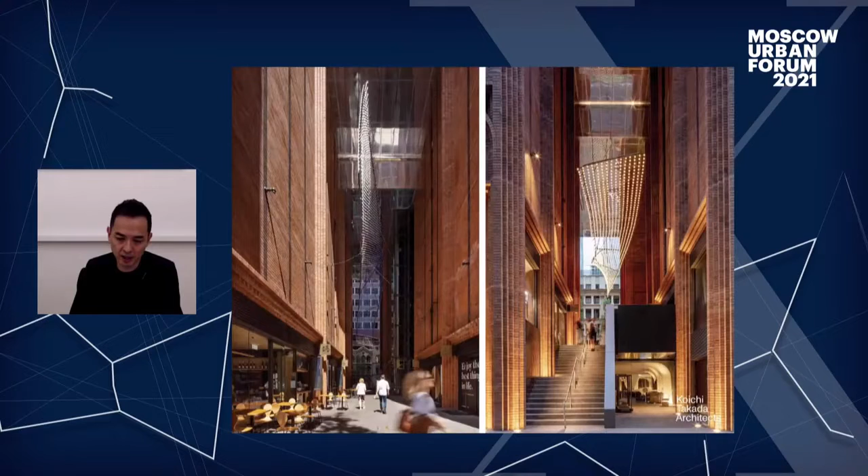ARC is a mixed-use project we designed in Sydney CBD before the pandemic crisis took place. ARC was conceived with people in mind. The mixed-use functions include residential, hotel, office, retail, food and beverage. We designed a laneway to bring people into the heart of the building. By opening up and giving back the public realm, we aim to humanize architecture.

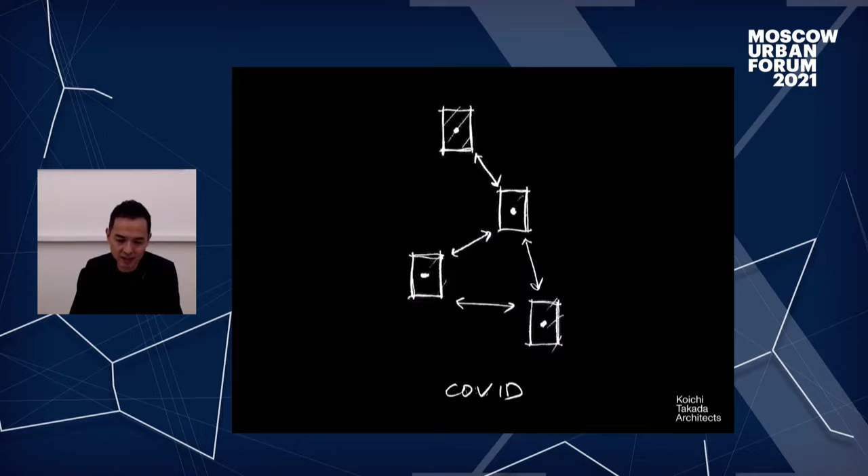But during the pandemic, celebrating the public domain has been challenged because of social distancing. Our cities and public spaces have become empty. So how do we measure the success and the balance of architecture when people disappear from the city?

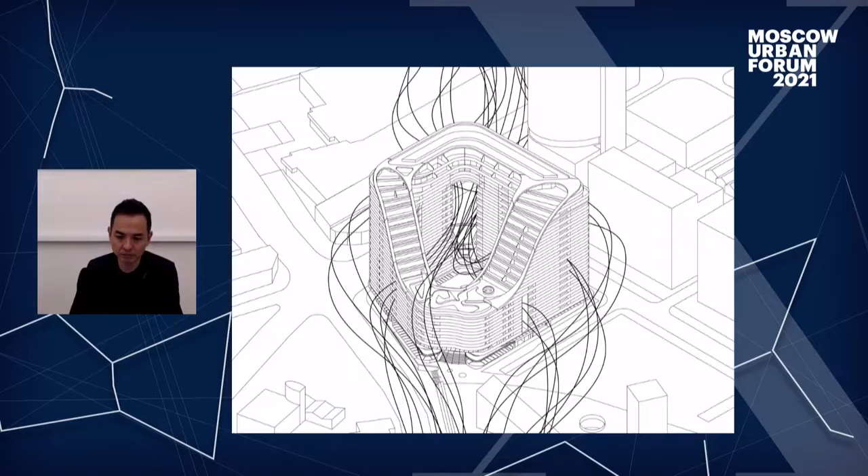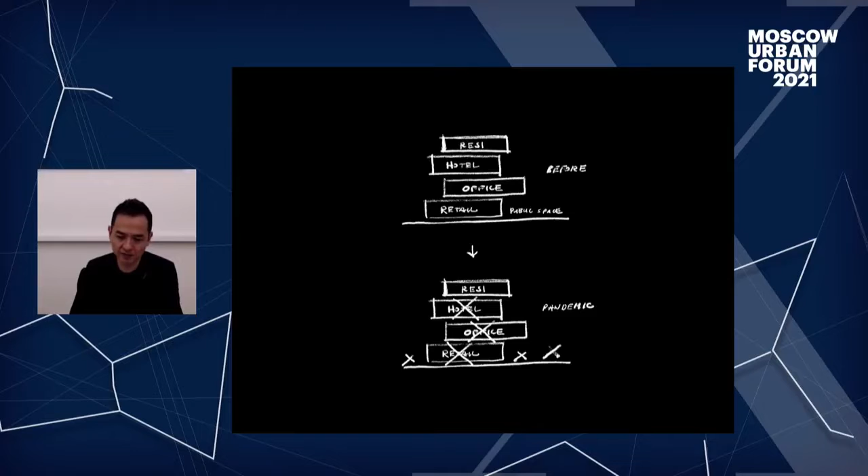So the pandemic has highlighted limitations in the mixed-use model. Both my projects ARC and Infinity suffered during the pandemic because retail went to online shopping, food and beverage became takeaway only, offices became empty, and hotels were used for quarantine purposes. However, the residential function survived. So if we are to focus on residential moving forward, what is the new measure of the balance?

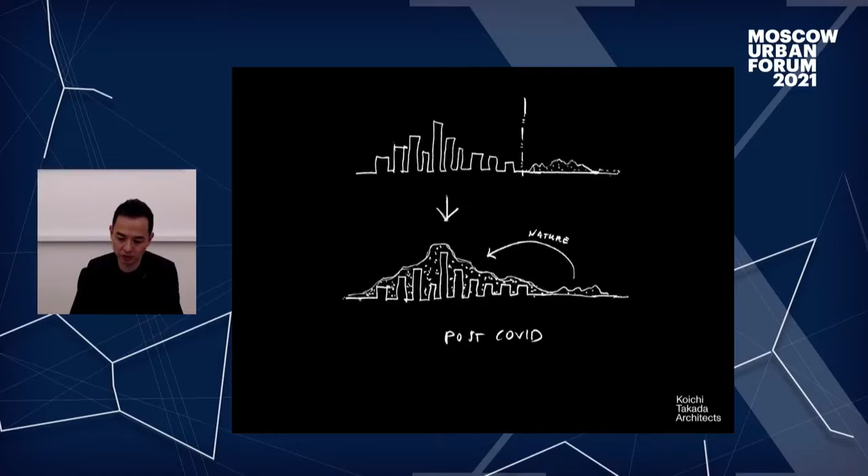I believe that post-pandemic, this is a great opportunity to pause and rethink, and not just adapt, but we must shift the paradigm from industrial to natural. This is one of my key responses moving forward: to bring nature back into the city.

I would now like to demonstrate this point with two new mixed-use residential projects, one proposed in the city and the other in the countryside. Urban Forest is a mixed-use project located in South Brisbane, aiming to be the greenest building in the world. The project draws inspiration from Australia's Daintree rainforest, one of the oldest rainforests in the world.

Urban Forest will be carbon neutral ready and provides generous outdoor space, extra space for home office, mixed use residential amenities, and surrounded by nature in the middle of the city, and even urban farming within the building. As opposed to a past project, Arc and Infinity, which provided hard urban surfaces as an extension of the streets, Urban Forest provides a public park which becomes breathing space within the city.

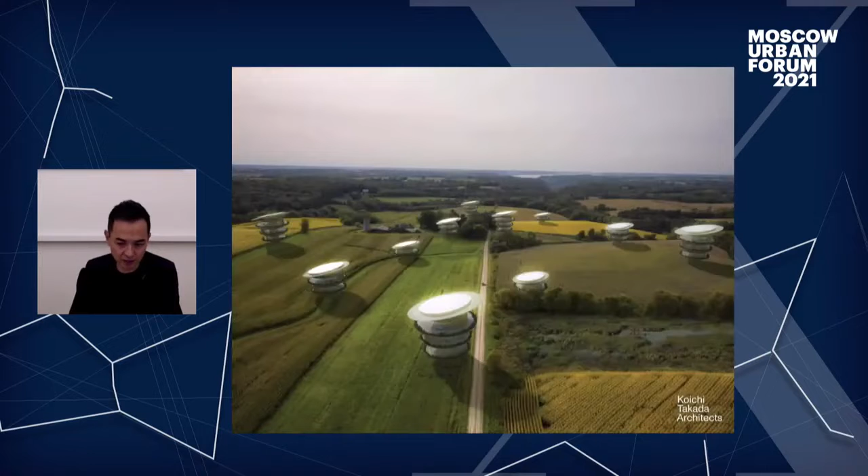Like the sunflower, the roof rotates to follow the sun and harness its power to store energy. Equally, the floors can rotate, following the sun during winter and turning away from the sun during summer.

This way of living and working in the countryside is challenging the traditional idea of mixed use in the city. Measuring the architectural success for the future should equally emphasize how we integrate nature in our daily life. Nature is the key. This last project I'm showing you is a mixed-use project in Shanghai, but without residential.

Solar Trees future-proofs the need for mixed use by creating one big flexible space. It is multifunctional architecture designed to adapt and change organically. Solar Trees in Shanghai is powered by the sun and forges a greener future for China. It's fast-tracking China's commitment to be carbon neutral by 2060.

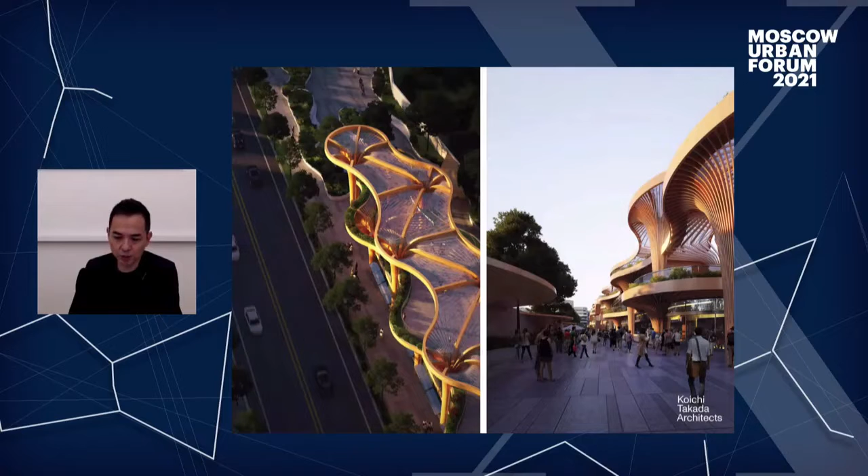Through a nature-inspired approach, this project considers the planet, but also changing function of our spaces, which in turn, we hope to bring people back into our cities. By way of doing this, mixed use becomes much more resilient.

I will finish with this last image, something we all have in common. Climate change and the pandemic has changed our world. So must our architecture. Architecture needs to adapt as quickly as nature does. Because architecture can greatly contribute to the making of healthier and sustainable places, our role never seemed so relevant in the context of healing crisis.

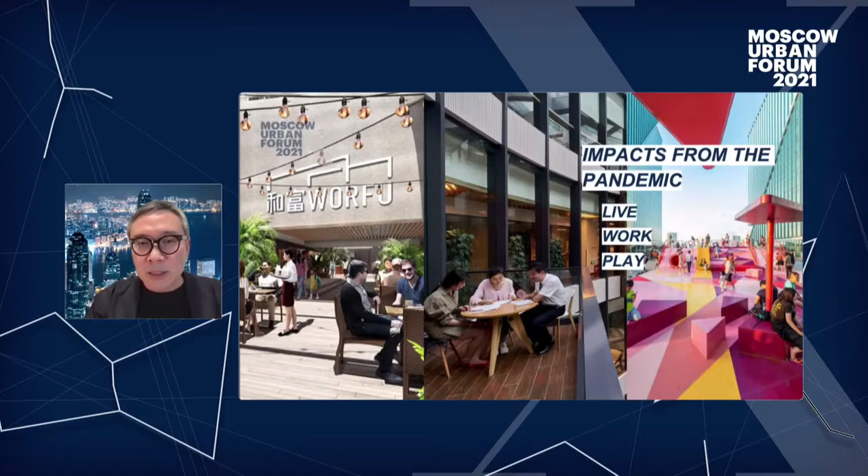I think that the pandemic has really caused a big shift in the way we live, work, and play. Certainly a lot of projects that we know before the pandemic, pre-COVID days, what we call it, they will have a very different effect on the projects in the future. I think many of us are seeing a very clear trend of a very big migration, shift in people. I mean, with people moving out of cities, moving into the suburbs, people are more reliant on online meetings with all the lockdowns that's happening around the world.

The concept of space is very different today, particularly in Hong Kong. Hong Kong is a very crowded city, so it's not easy for people to just move out and go somewhere else. With a lot of the higher property costs here in this part of the world, it is not so easy to move away.

But we certainly can see a lot of people leaving from the West. If you look at the United States, London, and even Japan, there is a very big shift of people moving out of the city. Comparing this with what we're seeing in Asia and Hong Kong, we are also starting to see a shift in the retail industry. When people move out of the city, a lot of the spaces within the town will also have to reinvent themselves.

Traditionally, if we look at the mixed-use model in the past, it really centers around transport as the main hub for connecting all the different functions from living, leisure, office, F&B. But moving on to the new mixed-use model, what we have found is that every project needs to be quite self-sustainable, self-sufficient. Projects tend to become smaller, but more complete, because when people live in the suburbs or move out of town, they need to still be connected. The functionality of the city needs to still be there.

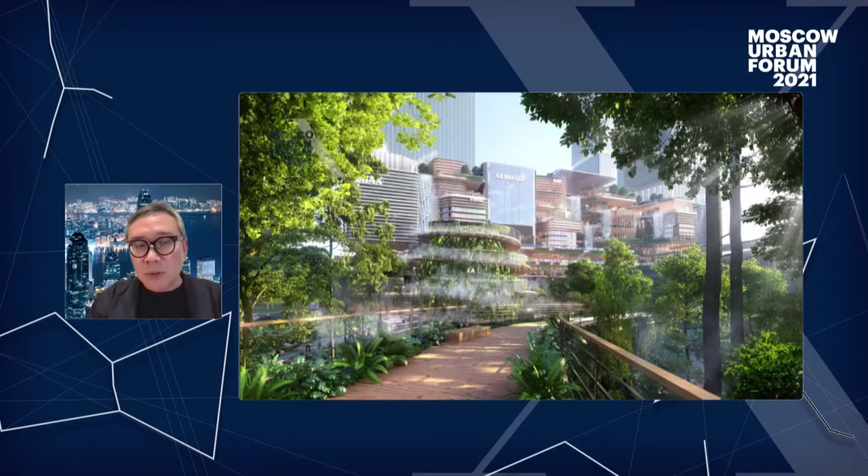But looking at a smaller scale, what we are finding today is that a lot of these mixed-use projects have a very close integration with nature. I think that is really important because, as we've heard before, nature doesn't really need people, but people need nature. So if we think about what happens to the spaces that are left behind, we have to find a very creative and flexible way to adapt to this new ecosystem.

Looking at the traditional model, we tend to see every function as pretty independent from one another. But certainly from this part of the world, from Hong Kong and Asia, a lot of the mixed use today not only combines all the different functionality within the same plot of land, neighborhoods are being changed. We see a lot of pedestrian streets today. People tend to want to live right in the heart of the neighborhood, where you can conveniently go downstairs, get a cup of coffee, and not be too far away from the metro station.

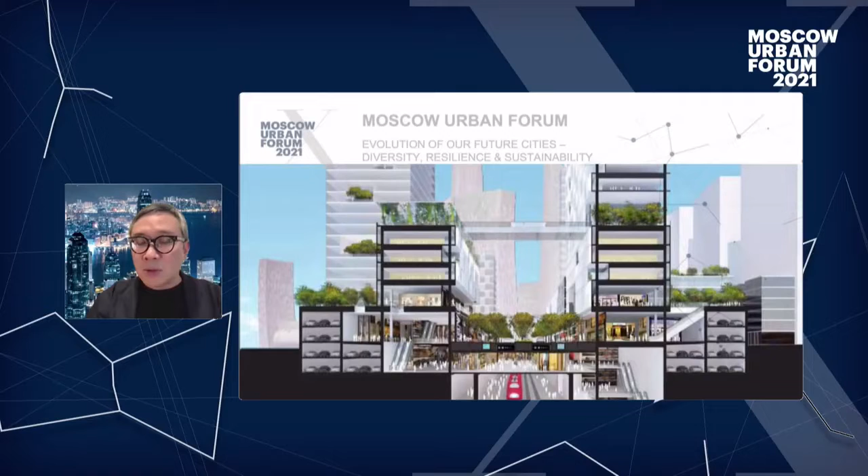But if we look at a bigger model, this project is another one we're working on in Beijing. You can see that the entire high-speed rail system is integrated as part of the basement infrastructure, and that will certainly bring a very big change in our urban environments. We're now seeing mass public transportation at a scale that is really, really huge, integrated within the neighborhood. Not many countries in the world can enable this type of infrastructure.

Looking at it at a smaller scale in Shanghai, this is a project we're currently working on. What we're seeing is a vertical network of road systems, because the projects are getting bigger these days, we cannot depend on the city for the road network.

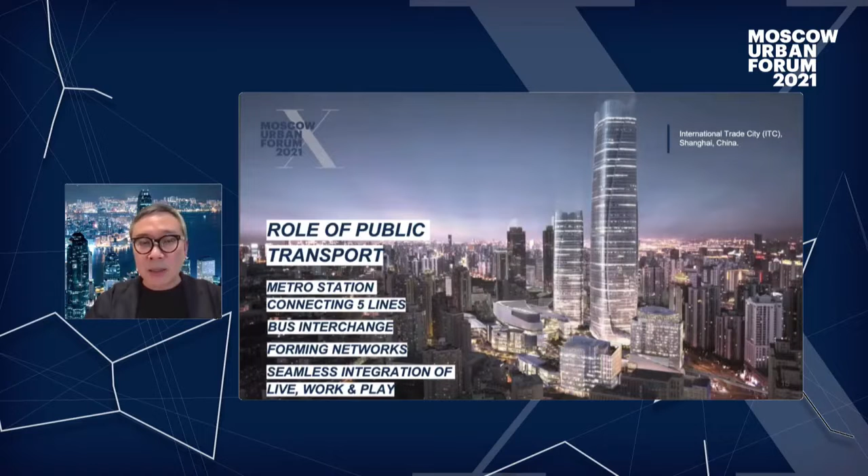It will create a lot of pressure. What we need to do is to create our own internal transport network by allowing cars to drive up to level 2, level 3 hotel, level 4 office. So you can see the role of public transport does play a very major part.

We are also seeing open plazas, elevated streets. Not just this public realm, but a lot of the hotels, apartments, retail, and entertainment components tend to be a lot more seamless today with the role of public transport coming in.

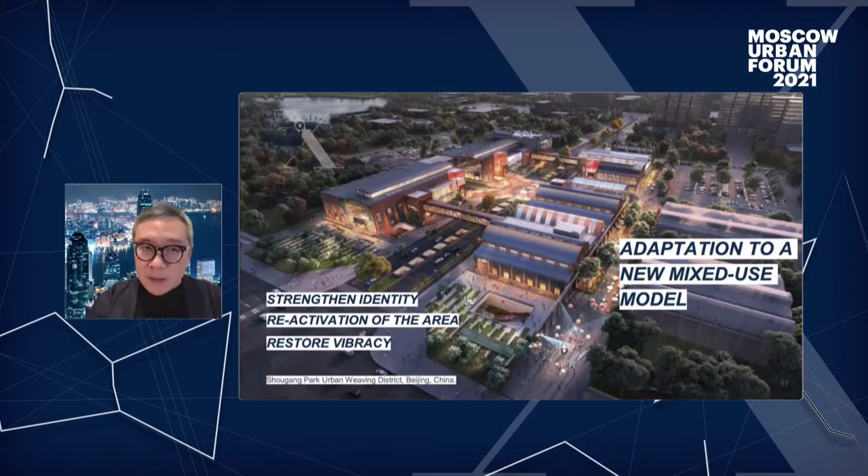And obviously, in every city, there's always history and heritage. So we need to be sensitive with the current use of the building, pre-COVID and post-COVID, to preserve its memory and function. A project in Beijing at the moment - you can see this is a warehouse district that has been regenerated to create a very vibrant commercial community.

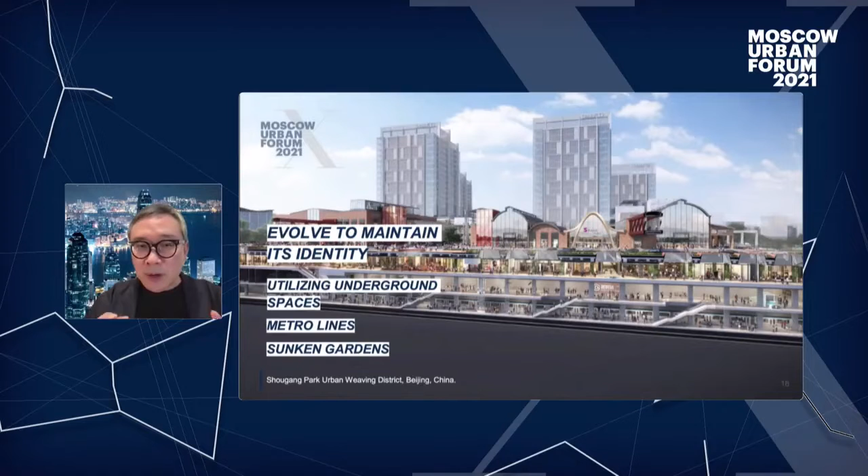And because of the weather, just like Moscow, it gets very cold in the winter. So there is a very big component of the project that is allocated underground, where it connects to the metro system. I'd like to share this, coming towards the end of my materials.

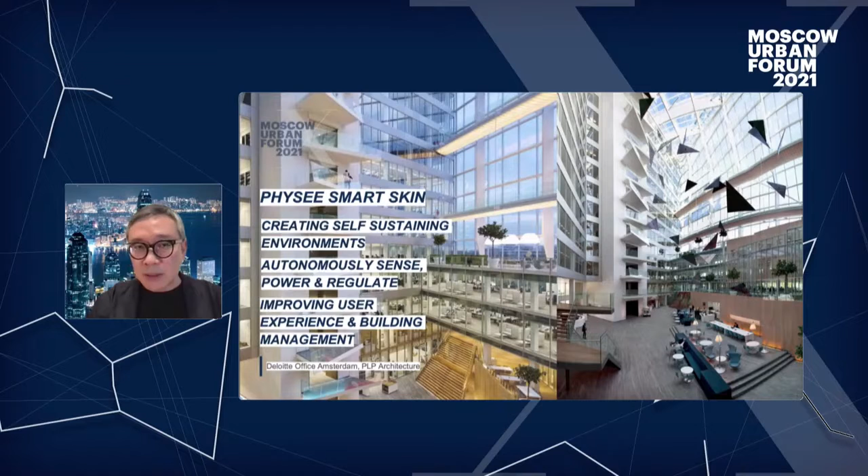And finally, in the course of all this design and construction, we also look at smart materials. There are a lot of very innovative materials on the market today. Some we really like include the concept of a transparent solar skin that can be integrated as part of the curtain wall systems in buildings, creating an innovative way of harnessing energy that we can reuse.

And even kinetic paving, very popular in Hong Kong today - we see this being adopted commonly across a lot of projects. Also the media scheme concept, creating a super transparent media that could be part of the architecture of our facade. This also enables a lot of information to be shared, and I think that will certainly transform the way we look at buildings in the future.

So these are some of the points that we feel are interesting, and I'm really glad to be able to share that with everyone today. Thank you.

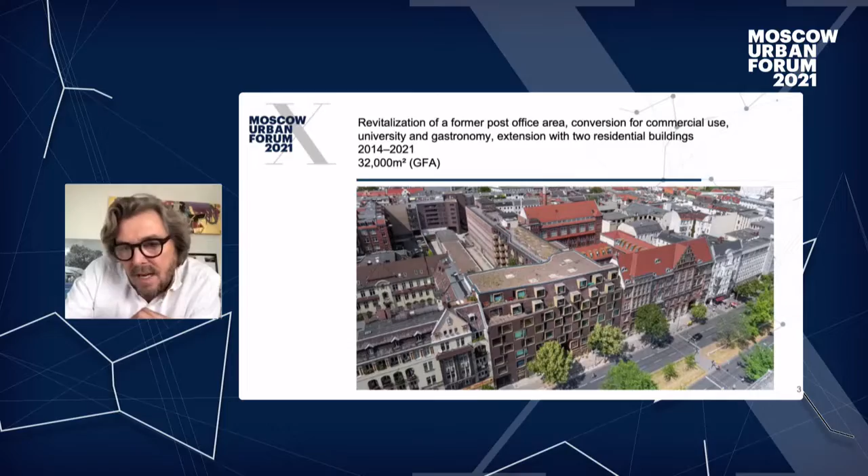This is a project in Berlin I want to show you, because I think it shows nicely what we try to do there. It's an entire block, in between two different streets—one very busy, one more pedestrian. It is a construction site that started at the fin de siècle, in 1903.

The first post office in Berlin was created there, and that was the first building. Then House 2 came in 1915, when the telephone was invented, you had the people that connect people. In 1931, all of a sudden the car is helping in the postal services and so forth. So over time, buildings had accumulated and they all created their own little identity.

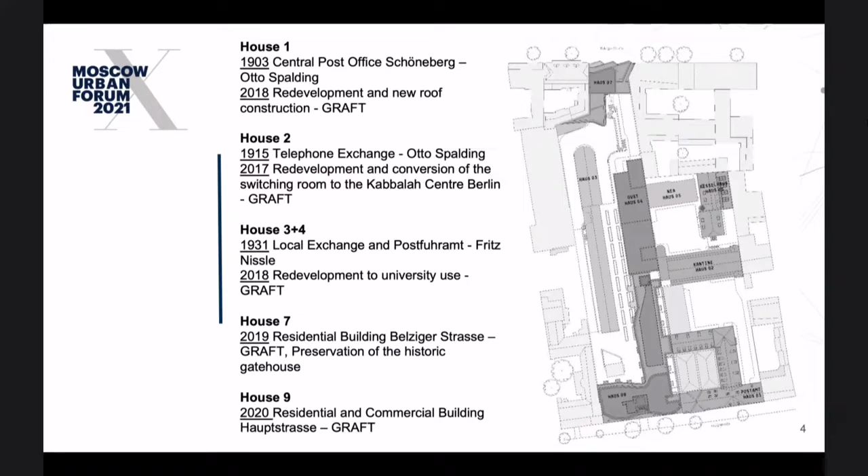When we were asked, a bit before 2018, to redevelop it, we tried to look at the buildings and honor their characteristics, honor their own identity. This is the project from the top—I don't know if you can see my cursor, but basically this whole environment here in the center is our project.

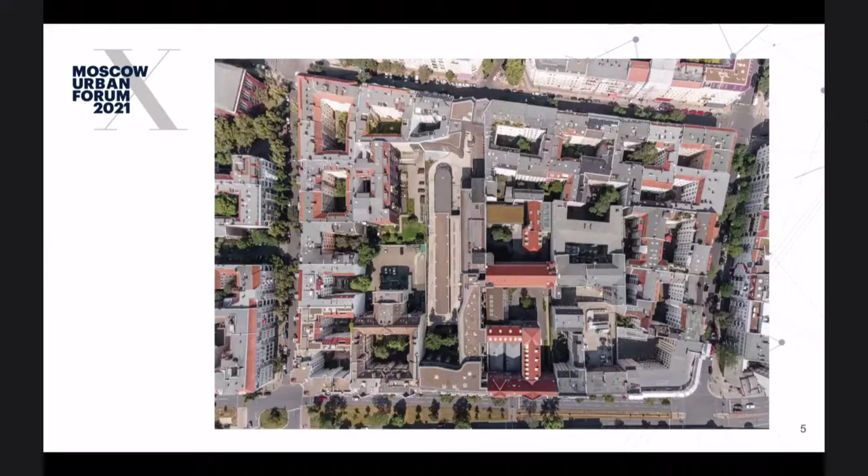We added a couple of components and reused most of the spaces into different things. There's still a post office, but it's much smaller. And we added new functions, especially residential parts.

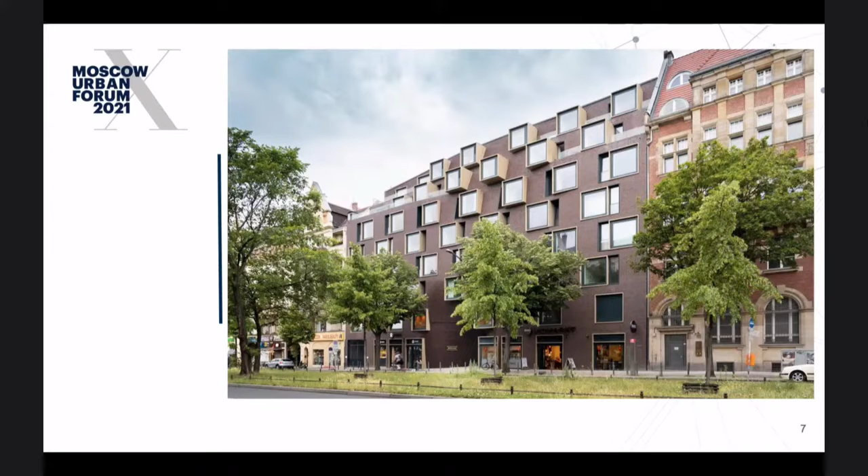The facade to the front is basically trying to use the brick story we found in Berlin and push it forward. You can see a residential building on top with windows—these windows basically establish the facade, whereas the brick, which you'd think is the facade, the brick structure now is actually opening up. It becomes amorphous.

It creates an entrance, basically bends away as a roof structure, but it's still brick. It's very nice because it's a protected environment there—a monument on the right of us—so we connect to the buildings left and right. The boxes establish the facade, they are straight, and the brick can move. It's like a little element that can move very nicely, and that's what we try to do.

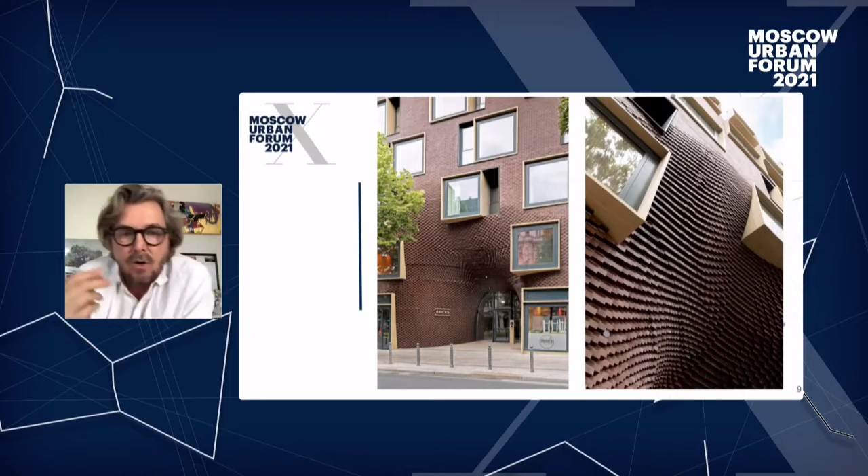We have retail on the ground floor, and living areas on top with little terraces, only in the roof. Then these boxes bend to the back, and from the inside you create a new space, an interesting space where we don't tell people how to use them—they create their own rituals. Whether this is your bedroom, your tea ceremony room, or just a hangout, that's up for you to decide.

When we go into the courtyard, we change these boxes into outside spaces. As I said, I believe every apartment these days needs an outside space. How you do that in towers is, of course, a little bit more difficult, but there are other ways to do this—Berlin is not necessarily a high city.

It's coming a little bit too slowly, I think. But here, this is not high-rise buildings, so you have to create these balconies that create their own personal framework in front of your door. So the boxes change into outside areas.

As you can see, also in the old elements, all roofs are reused, whether residential or other uses. The same elements, the same material, in this case a champagne-colored metal, is used throughout to create one materiality identity. So here we're looking from the side.

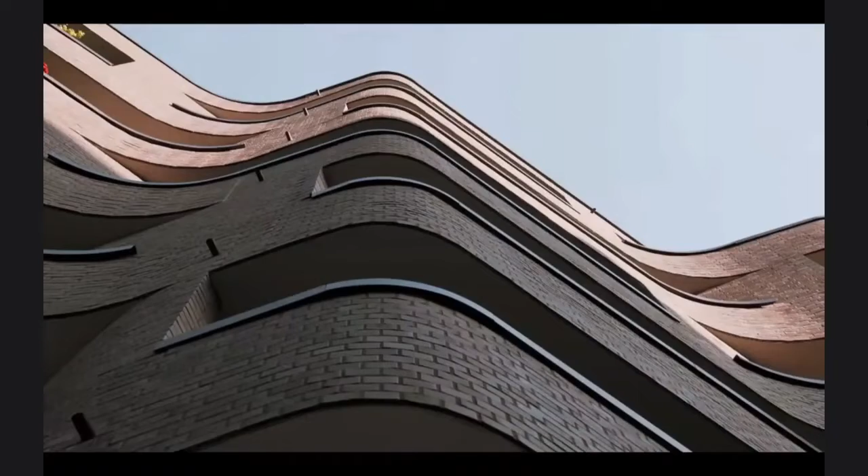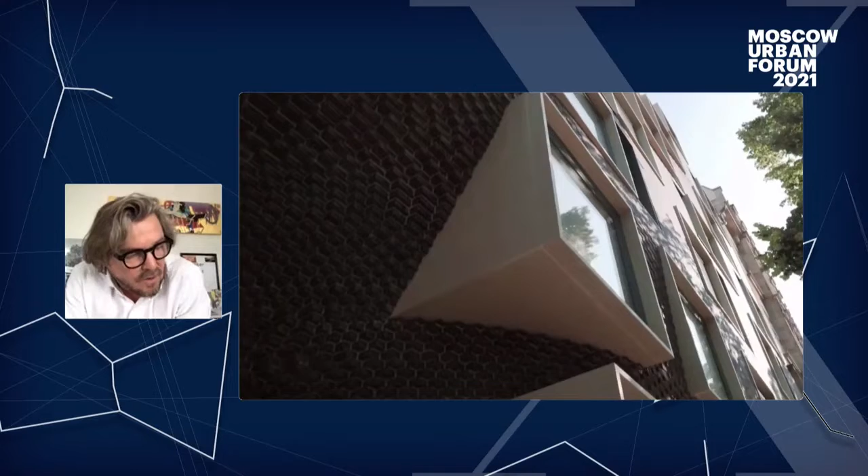The main thing, I think, is identity. For us architects, if you want to reuse things, as we've done in this project, there has to be a strength in architecture. And if we don't resolve to bring that strength and build it forward, I think our buildings will not last — meaning there won't be a heritage for the people who come after us. So the resilience of our cities has a lot to do with the identity we create today.

So things can't just look the same everywhere. We have to find the genius loci, work with it, and bring it forward. And there is the resilience of the future. And that is it — thank you so much.

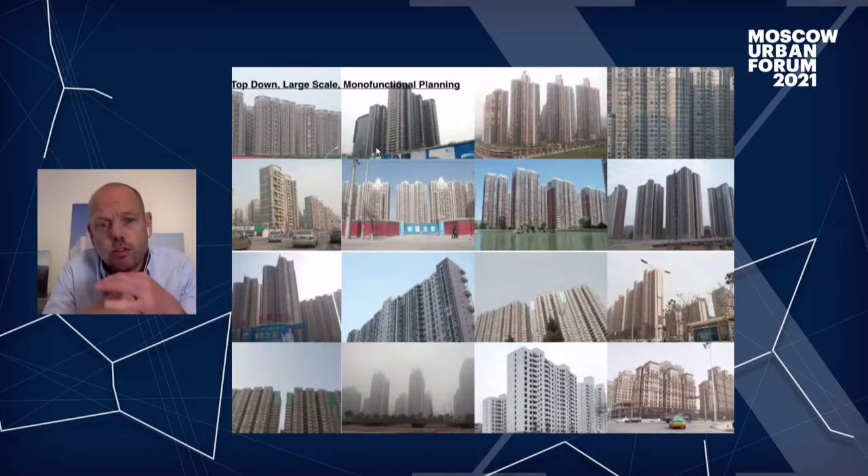I just want to share a little bit of the results of that research. So what we saw in visiting cities all over China, we realized that the method of planning was very much top-down, large-scale, monofunctional throughout China.

But we also found an alternative, the so-called urban village, a very much bottom-up initiative by farmers who saw their environment urbanizing around them and started to build small-scale settlements. The structure behind that urban village is a mixed-use environment combining working and living, very walkable so you don't need a car. It's a fine-grained urban fabric creating diverse living environments, very much market-driven and therefore bottom-up created, high density, and allowing for affordable housing as well.

In one of these urban villages, we met this guy, Mr. Sun. He is a farmer who created his own house, a commercial plinth, an internet bar, a private apartment on top of that, affordable housing, and then urban farming at the rooftop.

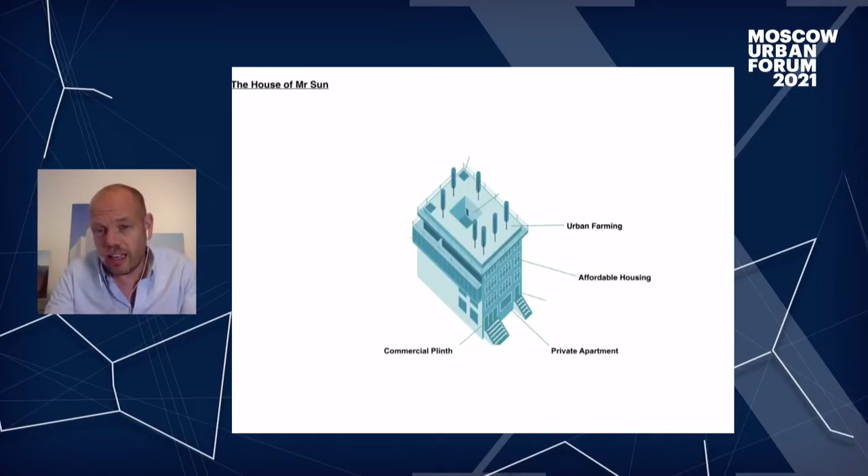That was very much our inspiration for our first building in China, a mixed-use building in the city of Jiaxing, close to Shanghai, where the idea of the village was at the centerpiece of our proposal, a combination of 8 buildings combining hotel, short-stay apartments, sports facilities, offices, restaurants, and an art gallery.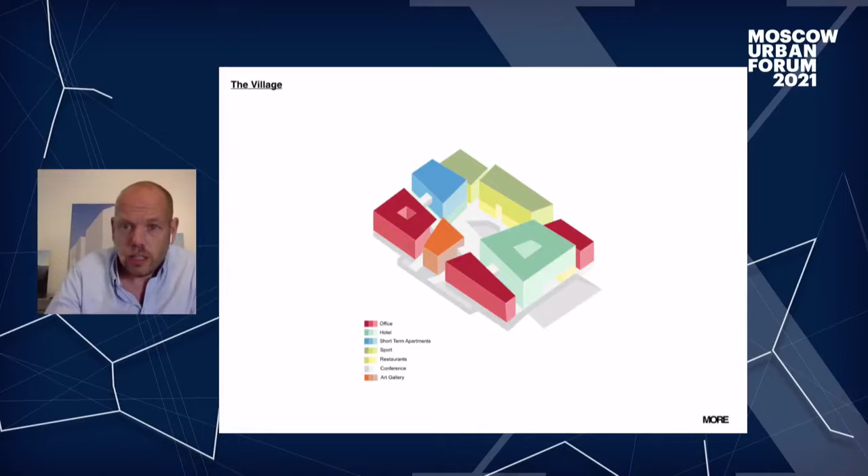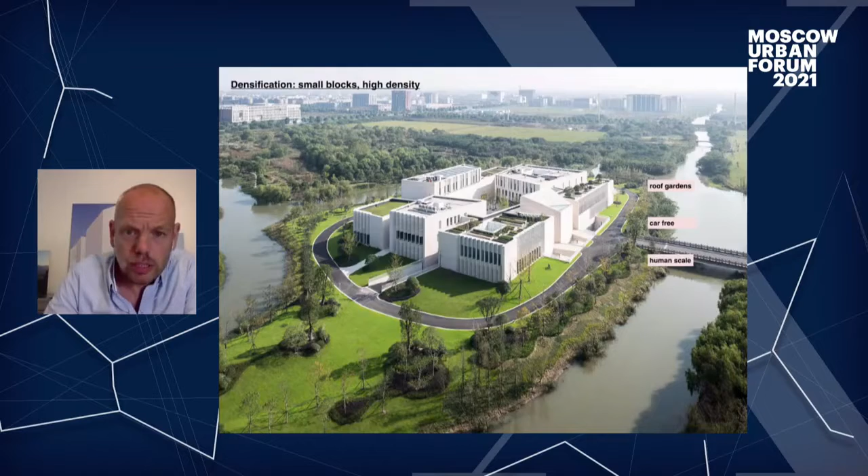Small blocks in high density, combining with public space at the very heart of it, and combining all these functions into one settlement, if you will, where the public space is really at the center of the development.

We densified not only through putting different volumes with different functions, but also by stacking. So creating F&B with a hotel on top, bridges connecting these different buildings, small scale so there's enough shade. We have active landscaping and stairs that act as an outdoor theater, and so forth.

So really trying to learn from what we saw in the urban village of Mr. Sun into this project. One critical thing is that we also introduced culture as a connector. There's a modern art gallery that, as you can see in the section, runs from the basement to the 3rd floor, almost like a mini Guggenheim, connecting all these floors but also connecting people. The gallery here is really a place for young kids to be educated about contemporary art, which is quite fantastic.

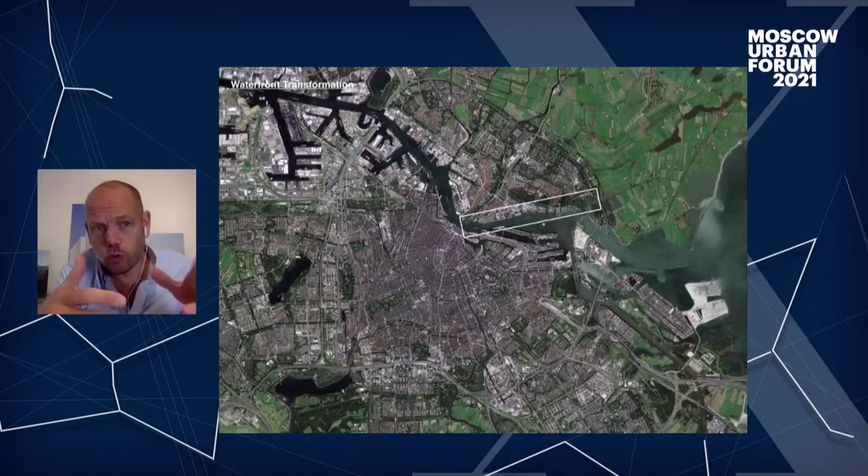Now these same principles we also try to introduce in our projects in the Netherlands, for example in this urban planning project for the city of Amsterdam. We were asked by the city government to make a proposal for this waterfront transformation at the heart of the city, traditionally an area with a strong division between work and live, and also two very different scales. The work scale is industrial, large scale, and the live scale is very small and intricate, but these are two worlds that are very much divided.

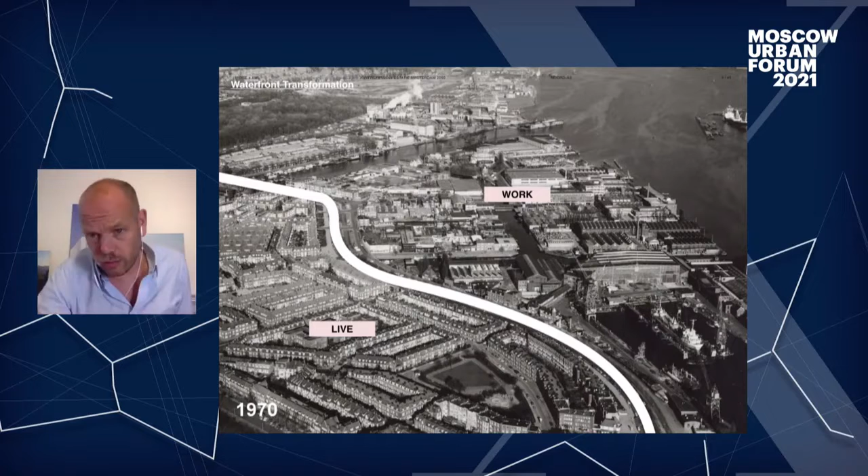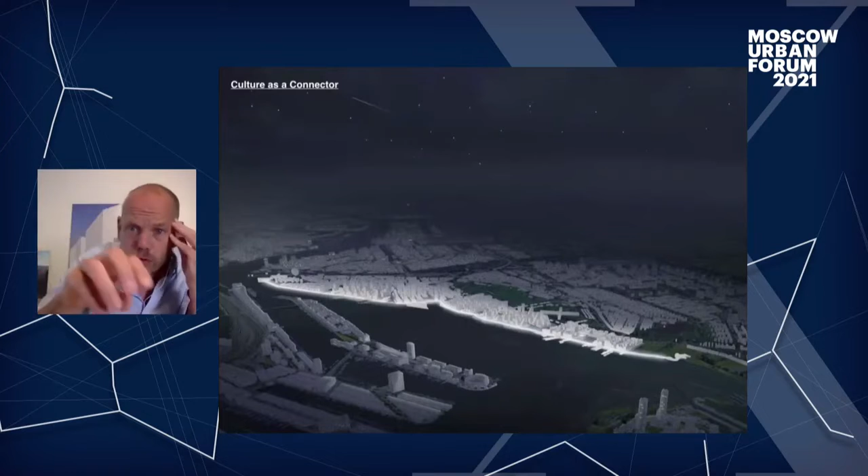We started looking at this humongous site and decided to divide it into smaller villages, smaller entities connected by one big public waterfront. So this idea of different villages with different urban identities and urban fabrics that are connected by one cultural zone, a public space at the waterfront that has a couple of cultural facilities.

But also trying to combine work and live in this area. What happens very often now in cities across the globe is that we are transforming places of work into places for residents, which is a good thing in the end. But we have to make sure that we also keep workplaces in the city, and that's not only office work, but also practical workplaces, places for creativity.

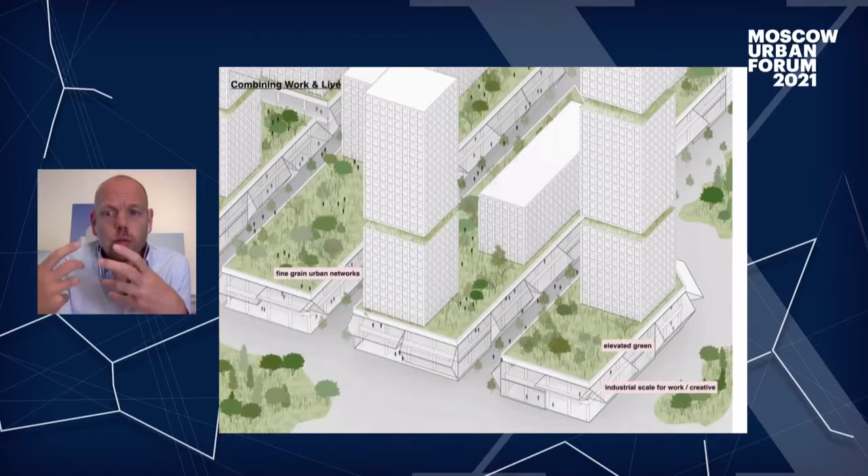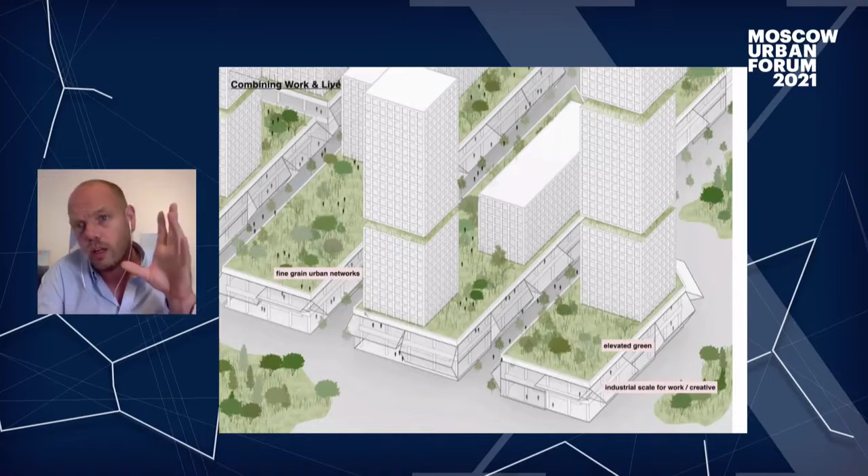One of the things we found is that by using this industrial scale that is already in the DNA of this area—these former factories and workshops and so forth—in your urban plan, you can allow for creative spaces, art spaces, but also restaurants and so forth. A higher base of these kinds of buildings allows for that.

And we're very happy that our urban plan is now being translated into the planning policy of the city for the future plans of Amsterdam 2050.

The third thing I want to share with you is our project Zoho in Rotterdam, which we worked on together with Eco Urban Design and a series of architecture firms—a winning proposal for an inner city transformation of a former industrial area into a residential area.

An industrial layer that has a bigger size and bigger scale allows for usage in terms of bars, restaurants, but also workshops, creative spaces, and so forth.

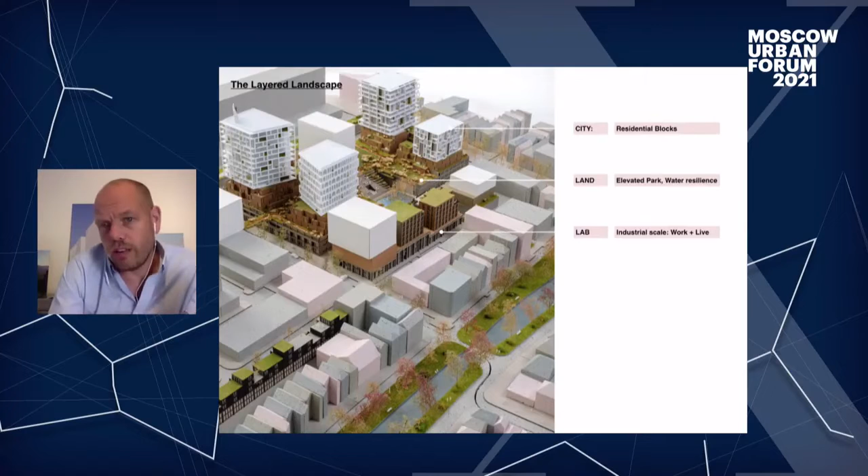On top of that, we create a park kind of layer, which is also water resilient, and on top of that, a residential zone. We're now working on one of these city blocks, creating huge diversity in housing typologies, careful detailing, but also green roofs, so that this land layer really comes into life and nature is close by.

Finally, one last thought about a project we're currently working on in Rotterdam, called The School. A couple of years ago, there was a very inspiring speech by the mayor of Rotterdam, who said: I'm fine with densifying my city, but let's make sure we also have public space at the base of our buildings—for example, schools.

So build schools in residential towers. A very strong, clear, and inspiring statement. We then got a commission to work on this former school building in the center of Rotterdam and transform it into a residential neighborhood.

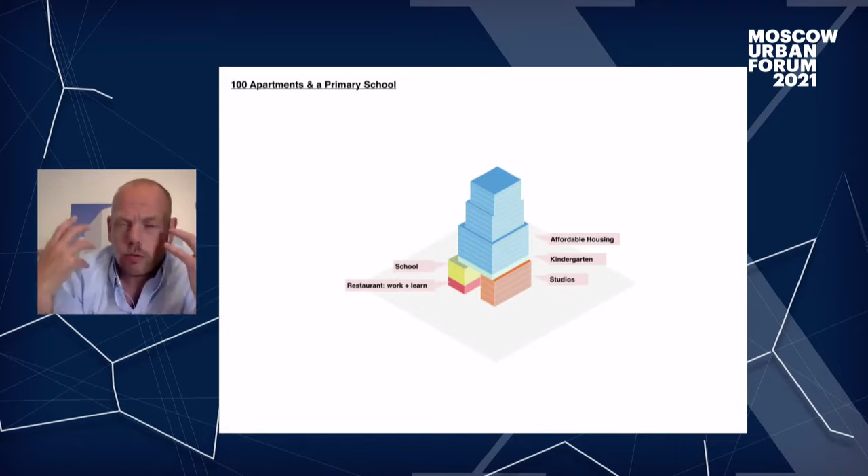We said, this is an opportunity too good to be true, so let's keep that school there, and on top of it place a high-rise with residential units. We created 100 apartments and a primary school, combining learning and living.

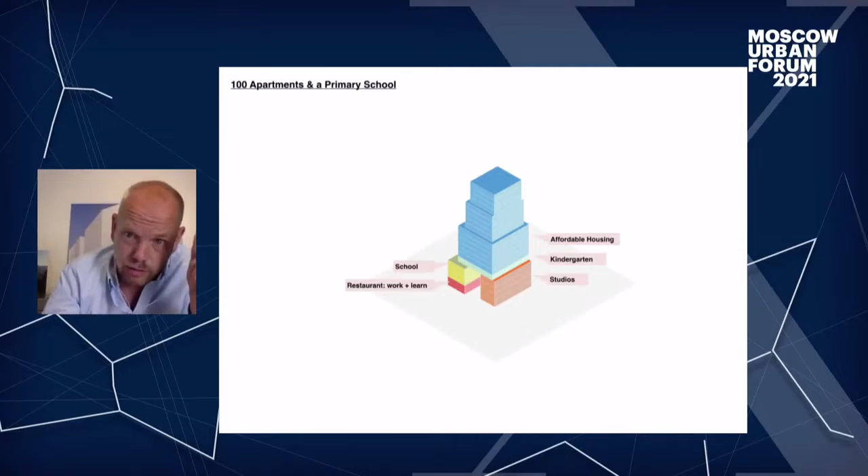So it's not just about mixed use, not just about combining work and live, but also learn and live—because by densifying our cities, we also want to keep families in our towns, and families have kids who need to go to school. So we need to create a place where we can learn and live together.

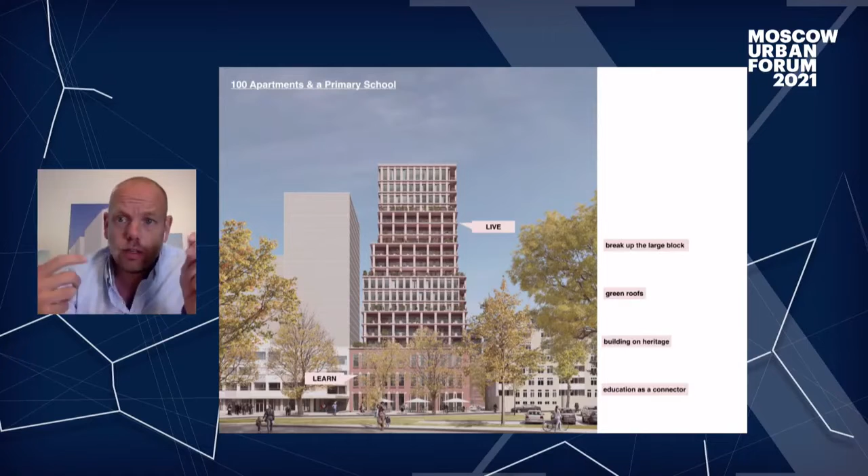Education can become the connector of cities, a vibrant base of a residential tower, a place where kids can keep on learning—in kindergarten, in primary school, but also in apprenticeships, in companies. So the school really becomes a machine for emancipation and connection in the city.

So back to Mr. Sun. What can we learn from this former farmer who is now an urban resident? I think it's four things. It's about fragmentation, breaking up the scale of larger blocks into smaller volumes. It's about creating fine-grained urban networks.

Fine urban grain also creates diversity in your city. It's about this industrial scale at the base—being inspired by the former factory scale—to create that as a base floor in your program that allows for a mixed-use program.

And finally, the cultural connector—creating connections through cultural and public programs. In the end, I think mixed-use environments create cities that are more lively, diverse, sustainable, and resilient over time. Thank you so much.

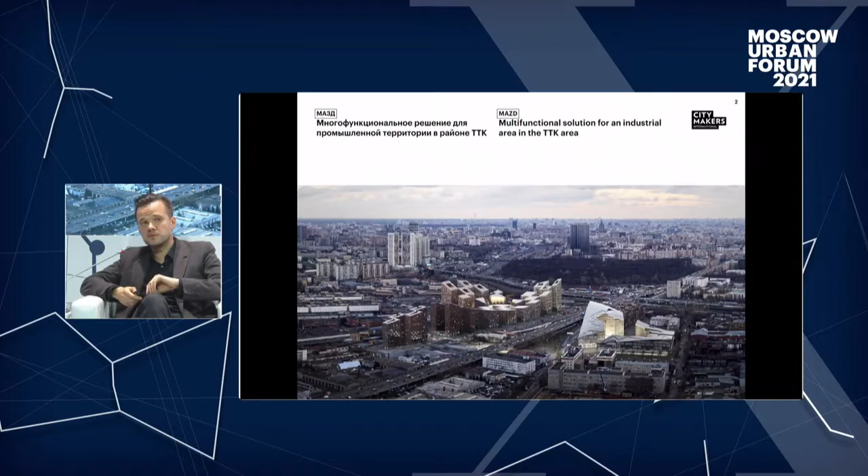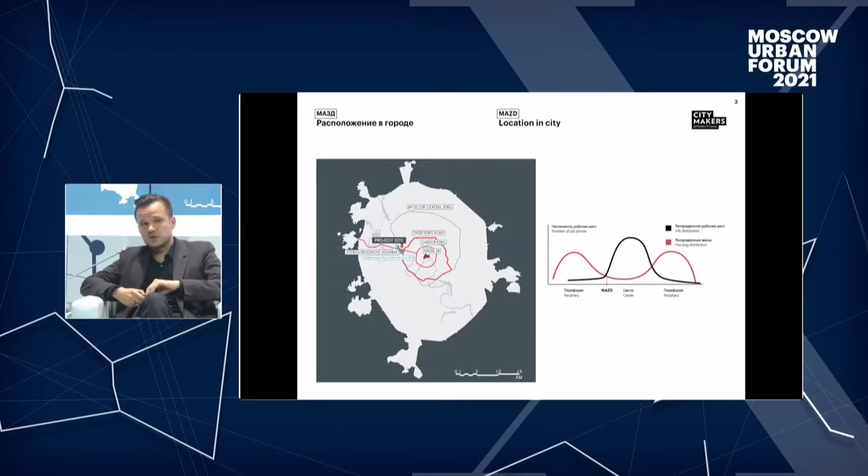On this diagram, I show that in the gray zone, there are no good housing buildings, and there are no jobs. There are no working spaces for qualified workers - there are some empty factories with category C office premises.

So we wanted to create some new environment there. We spoke with the customer a lot, engaged different experts in this program, but we managed to achieve a very good balance. Now we have 180,000 square meters of housing and also a significant amount of office buildings. But the problem is that around there, within 10 minutes walking distance, there is nothing useful, no functions. We had to reinvent a city in the city, building city functions from scratch.

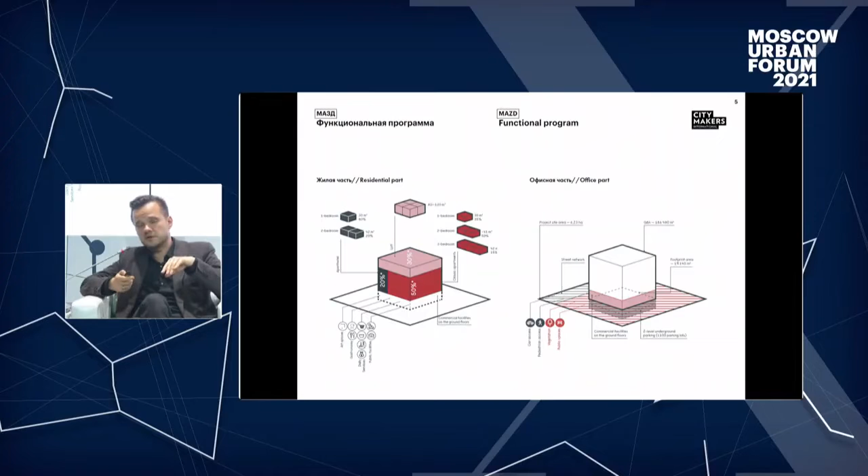It's like a mini village inside one block. This space is divided by a very big highway, that's why we had to do something to integrate housing with offices. At the same time, we had to do something for the level 0 space with public spaces and very active first floors having different functions. That's what we've done.

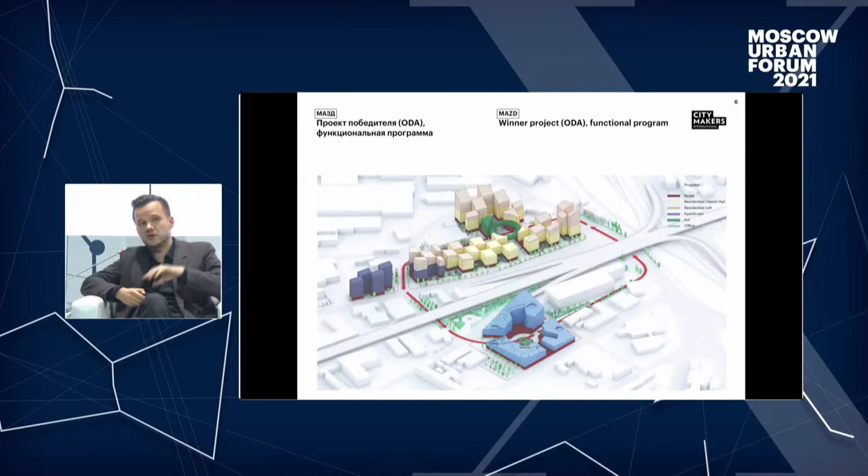And offices. But we wanted to create one circle. We wanted to combine different areas here, and we wanted this to be one living organism which has complementary functions - offices together with housing premises. Now it's a very interesting idea with good public spaces.

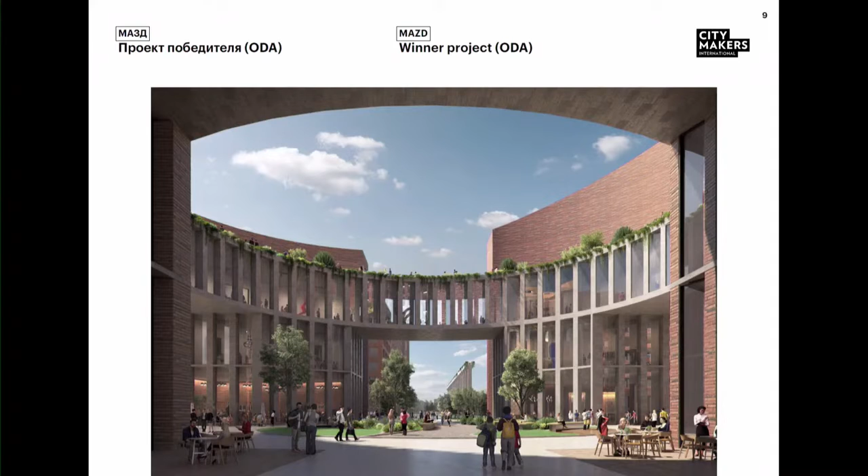This is a view of the offices, and a great art center around the plaza. It has different options - educational function, entertainment and sport functions.

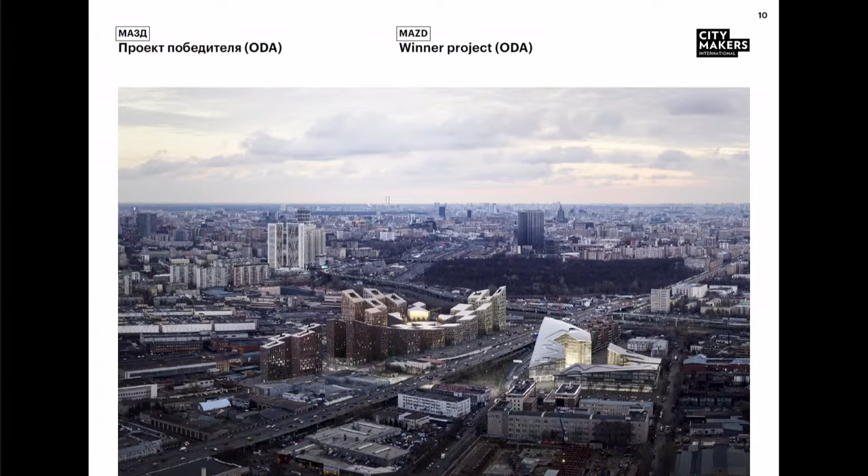And it's actually a very beautiful square, which will be the landmark in this part of Moscow.

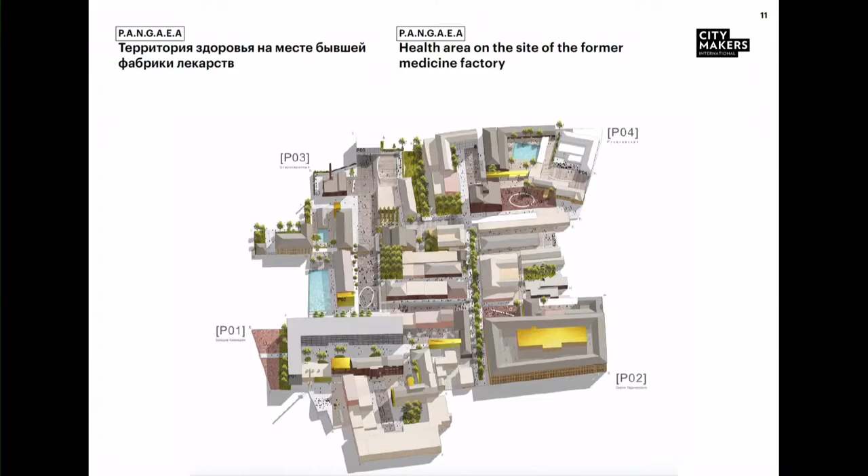There used to be Semashko factories there, producing pharma products. And we continued this idea.

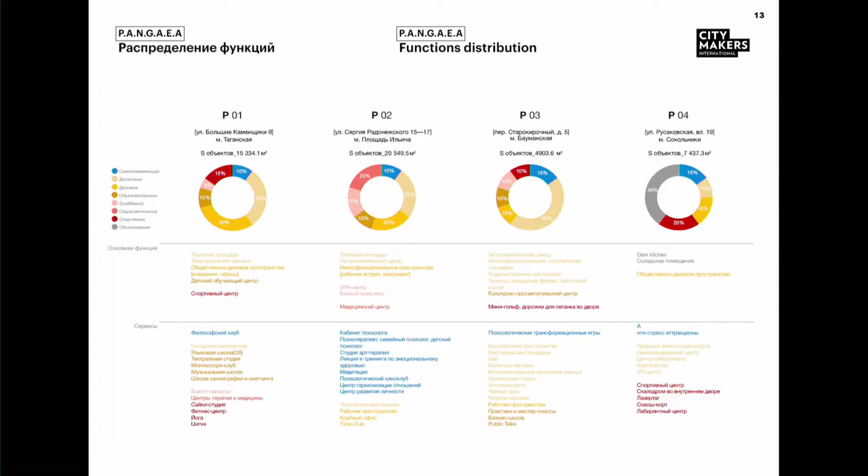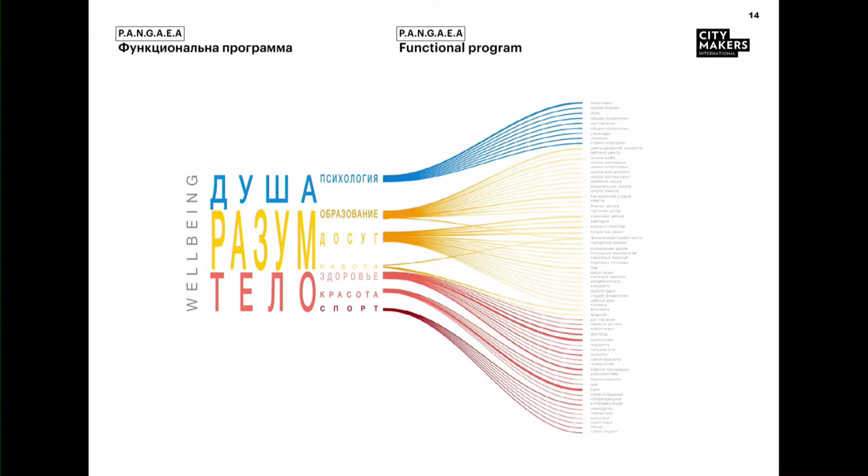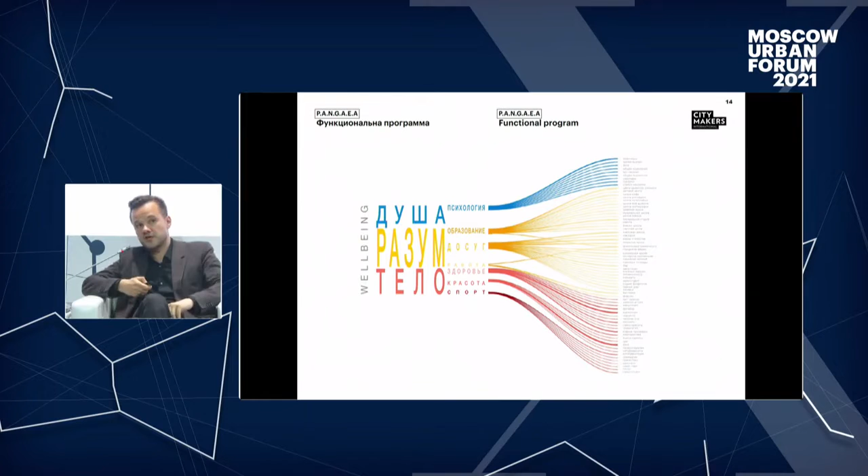This project has well-being functions - well-being for body, for soul, and for brain. All of them are also complementary. In the future, people will be moving between these objects, getting lots of services related to well-being, and every region will service a residential district around. Inside, we do not have any housing, and I think that's a good and correct idea.

This is the project at Sergei Radonezhsky Street. It's already been built, and it's managed by a very strong team which was responsible for Flacon Center earlier.

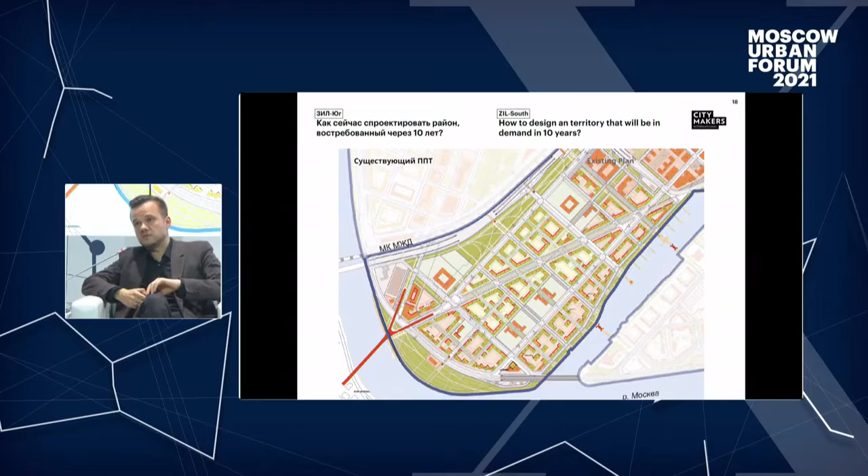The third project, which is in an active stage now - we've been developing it for 1.5 years - ZIL South. That's the master plan we have for this district, implemented by KCAP Bureau on the basis of our ideas and our inventions.

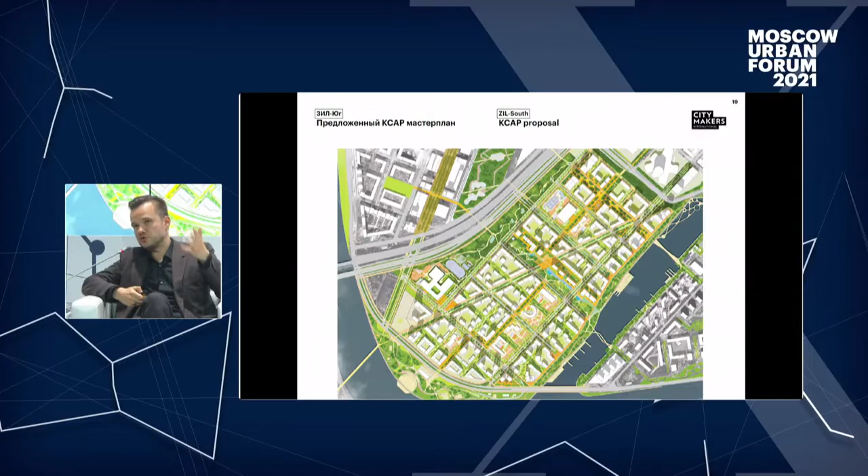And here we have 100 hectares of residential premises. We wanted to invent something interesting for first floors while the houses were already there. I think there will be new types of lifestyles after all these projects are implemented. And now I'd like to give the floor to Anna Sokolova.

We don't need to change the space if we want to change the function, because we use lots of digital technologies. Could you tell us about the practice of developing projects? How do you use digital services, and what are the benefits?

Good day, my name is Sokolova Anna. I'm the marketing developer of Ingrad developer company. For 17 years I've been working in real estate.

We analyze the market, we develop concepts for housing complexes, and I can see that in the last years we've changed the concepts of complexes. Quality is better, functions are undergoing evolution, and technical functions are changing. Right now we have a period of uninterrupted technical revolution.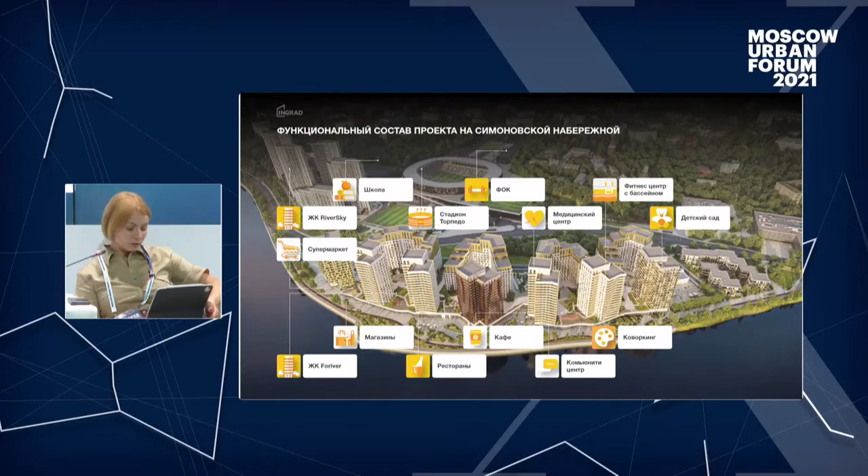Now we have the digitalization era and mobile services are developing. We can improve functionality. We can add new functions to our complexes without providing some physical space for these functions. There could be optimization of these functions.

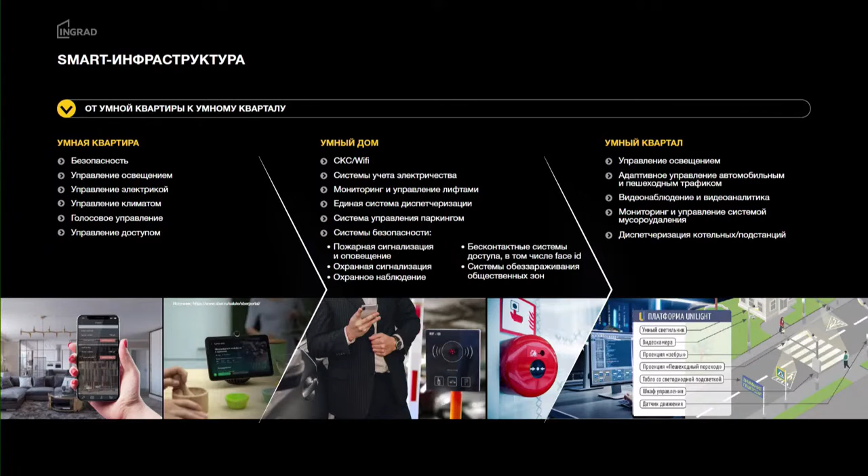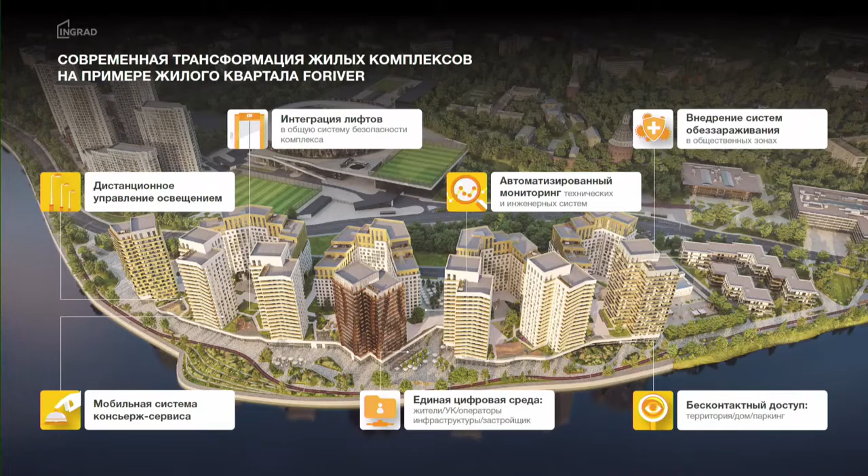We see the shift from scattered objects to the situation when we have all the functions and objects within one house. Digital services are becoming more and more popular, and this would change the concept of multifunctional complexes when we have to optimize space and at the same time create diversity of functions. Really great diversity is now possible, and tenants will be able to use more functions than before.

Another good trend - we see the combination of different facilities in one digital environment. Technical area is getting more complex. We have new opportunities for exploitation, for maintenance. It's possible to get additional income because we can add additional services and functions which were not possible before, especially when the space was limited.

This is one of the good visible trends that we notice. So it's not only the change due to the pandemic times, but also digitalization. It's one of the phenomena that drives a change.

Thank you very much, Anna. Interesting idea about the fact that digital products can transform functionality of physical buildings. Maybe this is the road that we should go down to. That's what we can do with existing districts, residential districts. Maybe this is something that's going to change the face of our cities.

And now I'd like to give the floor to the next speaker, that's Vladimir Shekin. Vladimir, you work for Rodina group of companies, and I know that you have one extremely unusual type of complex. It has housing and some other functions. Please tell us about this idea.

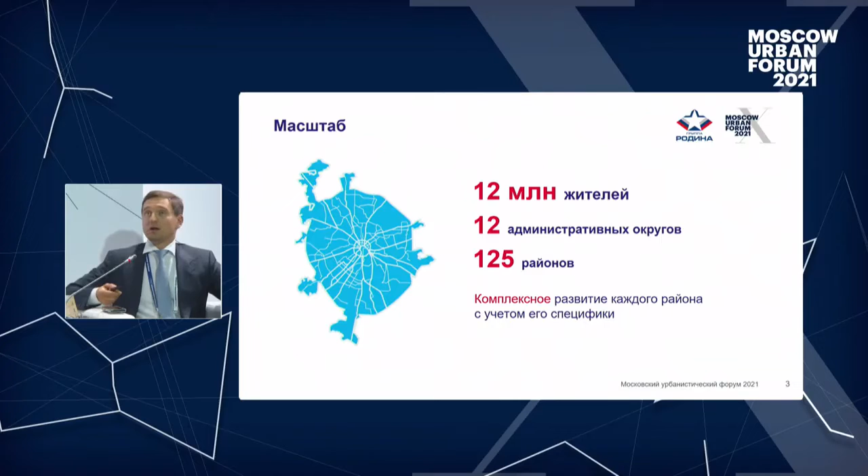Developing cities like Moscow is quite challenging, because when you are developing a city for 12 million people, you have to develop 125 different districts. This development has to be comprehensive and balanced. Balanced means mixed use and self-sufficient districts. And a 15-minute city means everything should be within walking distance to a comfortable and convenient environment.

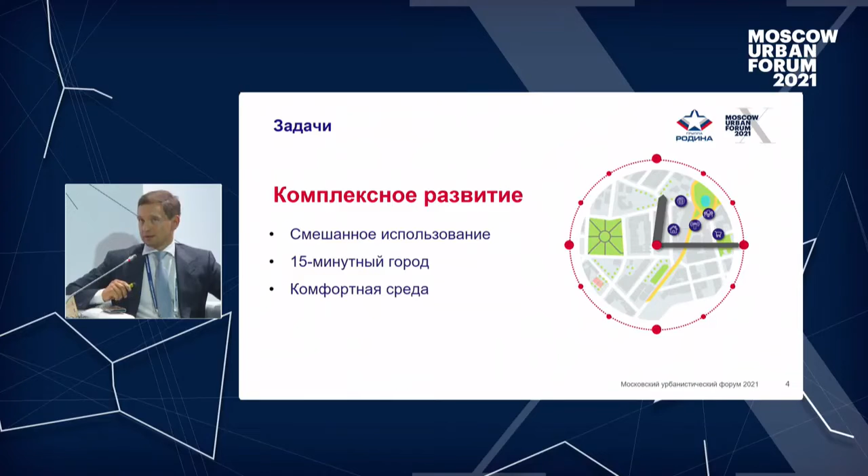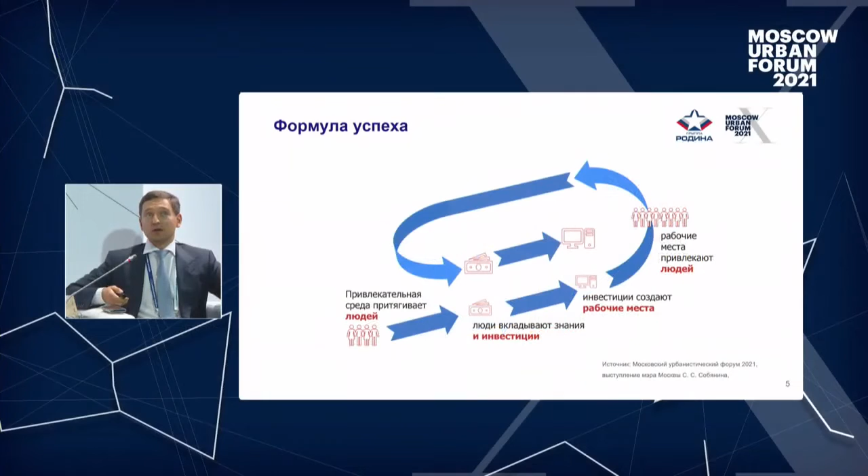But how do you reach that? Again, yesterday, back to the plenary session, I liked very much this slide shown by Mayor Sobyanin. This is the formula of success which helps us develop the cities. This is when you create the environment which attracts people, and these people invest their knowledge and investments into the city, thus creating jobs which attract more people. It turned out that this formula of success...

...is laid into the foundation of our life clusters approach. We are different from other developers. We don't proceed from classical restrictions or limitations, or from the current situation, but from understanding what people would be interested in doing on that territory, what activity they would be interested in, what professions they would like to choose. After that, we ask: what will help them to implement or realize themselves? And after that, we design a safe and comfortable environment, which is much spoken about.

So the difference between our approach and other approaches - the live housing cluster is an example of mixed use development. The high-tech jobs, which due to the positioning of our clusters would be created, allow people to implement themselves in the future. And due to the infrastructure, they can achieve results and victories in education and culture, so the housing environment is part and parcel of that.

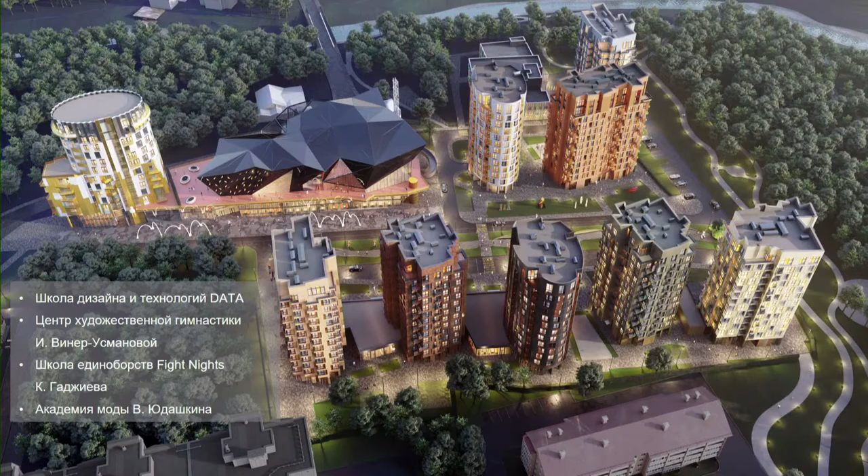...we have 9 hectares of park and a very long boulevard you can walk along, enjoying everything - unique aesthetic characteristics, etc. There is a river embankment, but apart from that we also set up an Academy of Fashion belonging to Yudashkin, and a center of Ms. Viner, rhythmic gymnastics, a mixed fights club, etc. You may have a look at how it looks. In a year's time, we're going to commission that facility.

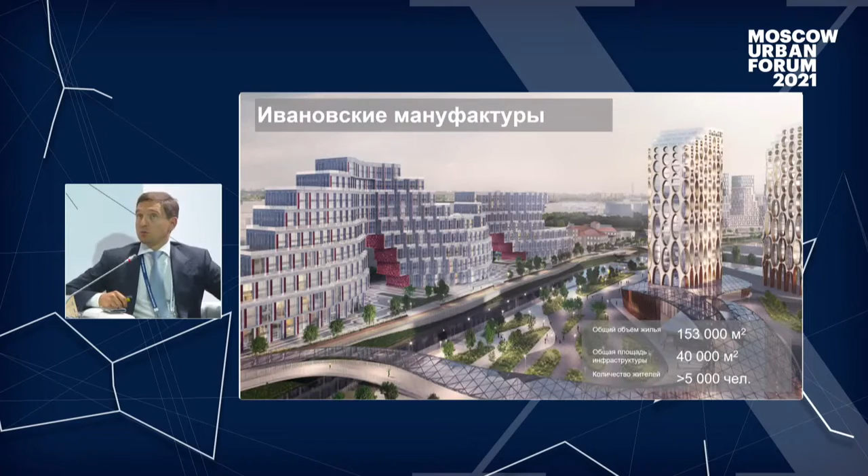That's the refurbishment which we offer, and this is our master plan. Another project: Ivanovo city. Ivanovo, at the time, was the third industrial capital. Then it became the capital of brides, meaning there were a lot of women working in the textile industry. The textile production was phased out back in 2018.

You have to do something about that industrial zone. In essence, we are restoring and reviving the business center. We are restarting, relaunching that, and instead of Ivanovo manufactories, textile plants and factories, we are going to build something new - a technical park, an industrial park, and also an international students' campus, set up following the instruction of President Putin. You see what requirements we set for that project - these are the preliminary solutions which we will certainly follow.

To close my presentation, I'd like to echo what I said from the outset: every activity actually has to be aimed at one thing - it has to be human-centric, aimed at developing the people, helping them to realize themselves. In our projects, we stand for the fact that our new generation has to be healthy, developed, and well-educated. So this is the key factor behind success.